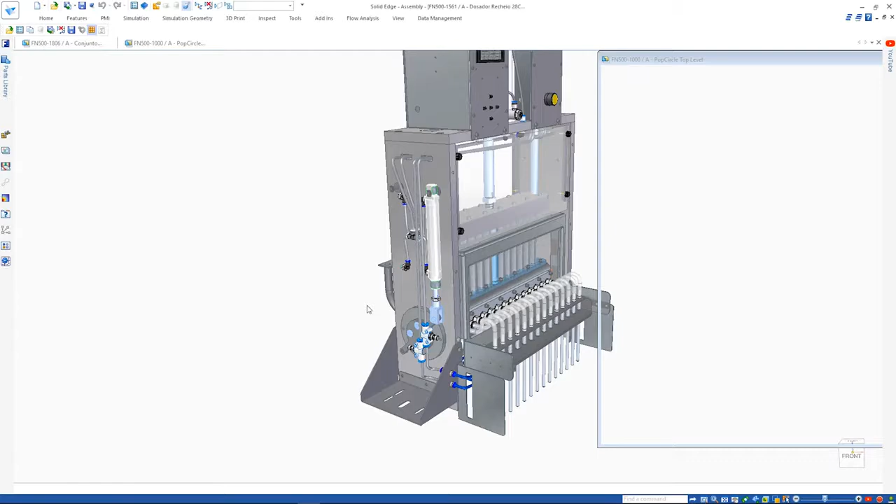It's common practice for suppliers to provide a 3D file of purchased items, such as this piston assembly. Using the new Internal Components option, all separate parts are contained within one single assembly file, with no parts written to disk. This enables faster import times, especially on larger data sets.

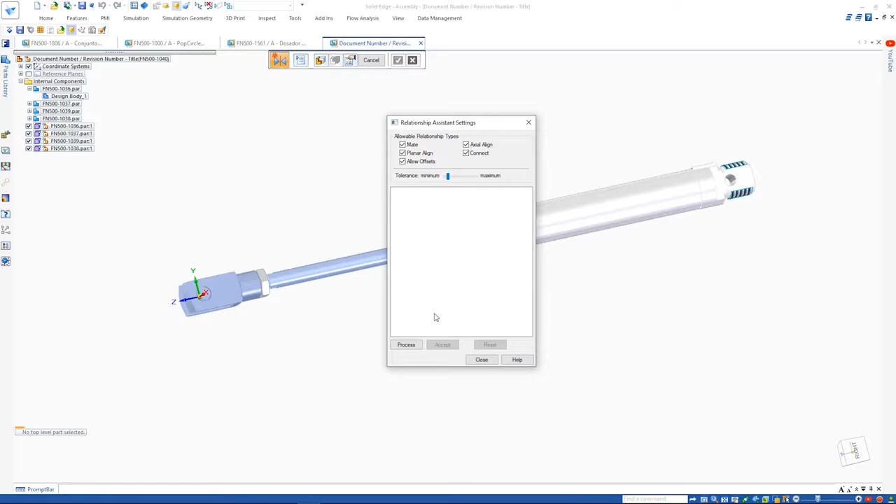Even though these parts are all internal, we can still analyze mechanisms and then assemble the item in a way it would work if it were a regular assembly. Assembly relationship creation and many other operations such as measurement can be performed on inactive parts. This provides increased performance and lower consumption of system memory. Here we see the correct operation of the piston assembly with its internal components.

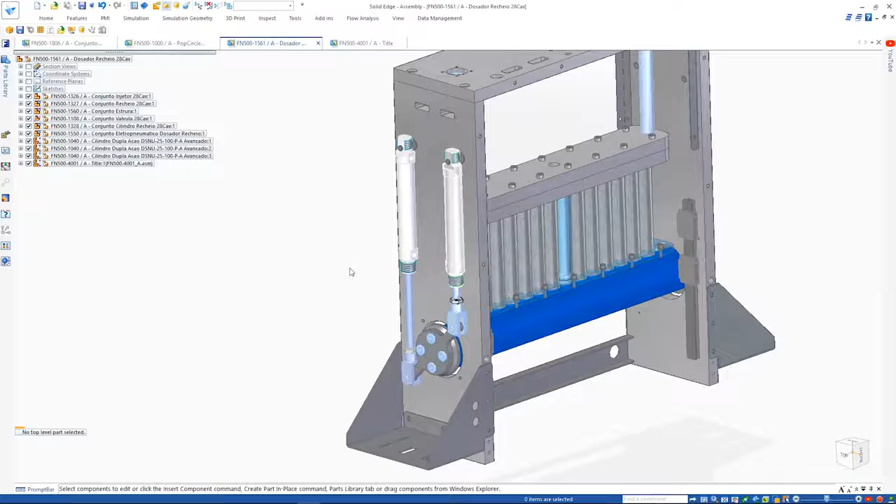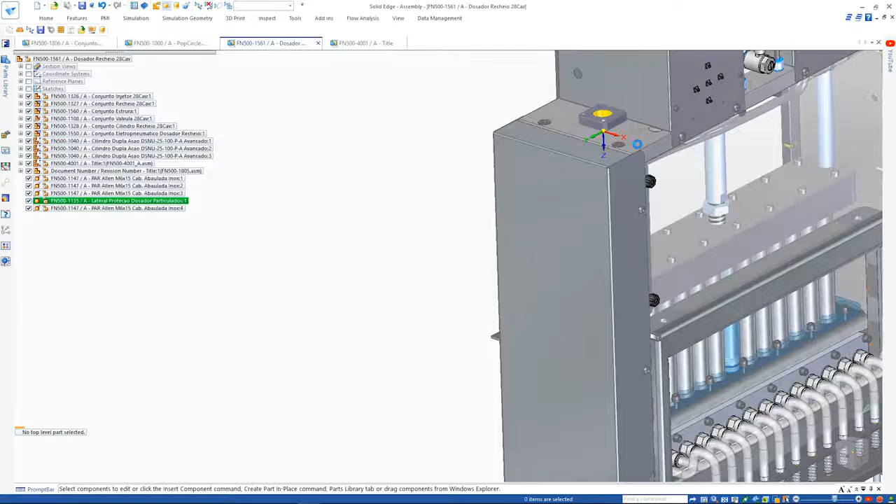Reusing designs is easier too. Now when copying and pasting multiple parts and assemblies between designs, existing assembly relationships are automatically captured and reused in the target assembly. A step-by-step process guides you through the operations to add the external relationships required to fully position the parts. All internal relationships come along for the ride. This significantly reduces the time for these operations.

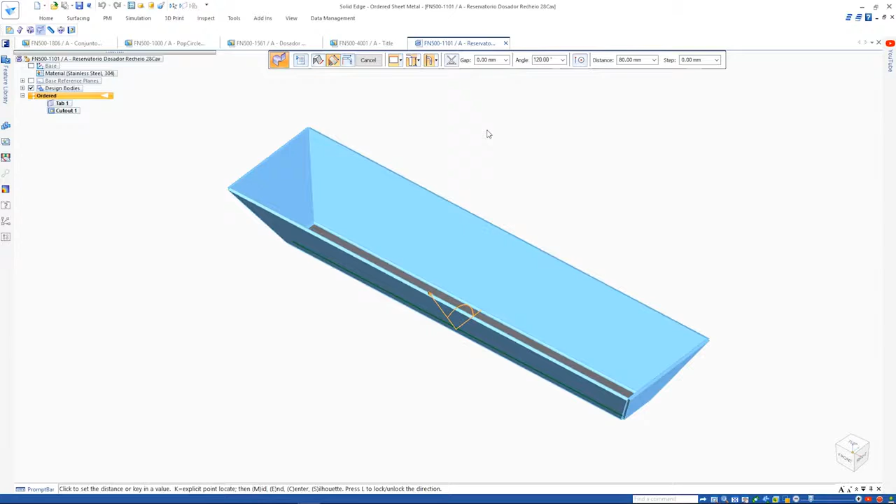A new multi-edge flange command speeds the process for designing sheet metal parts. Multiple edges can be selected at the same time, angles can be defined, and miters automatically added. It's as simple as picking the edges and then pushing or pulling.

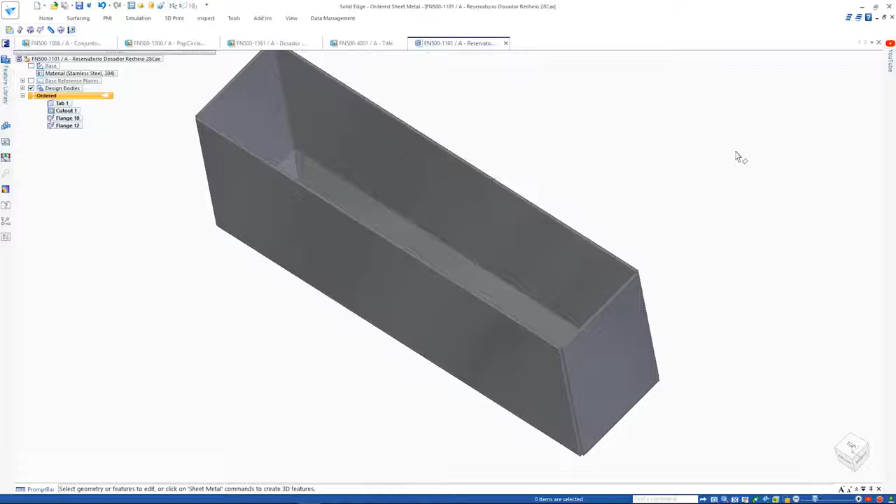In addition, partial or centered flanges can be defined, and trim options make light work of tasks that would normally require multiple operations, even with offset or gap distances if required. These sheet metal enhancements, along with many others, increase productivity and efficiency by being able to design parts faster and easier.

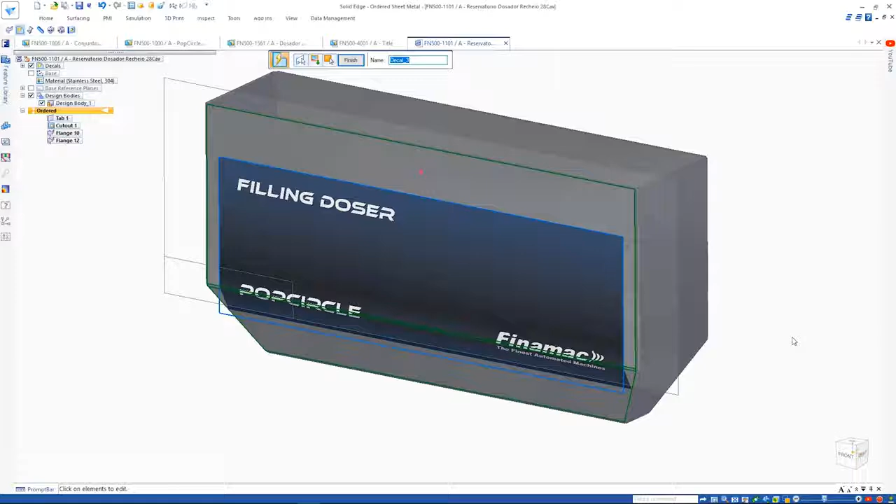A new Decal command makes it quick and easy to add labels and images to parts. Simply select the desired image, define the desired size, and position it accurately using regular sketch relationships and dimensions. The decal can span multiple faces as we see here. However, changing the position of it is as simple as modifying the dimensions or relationships.

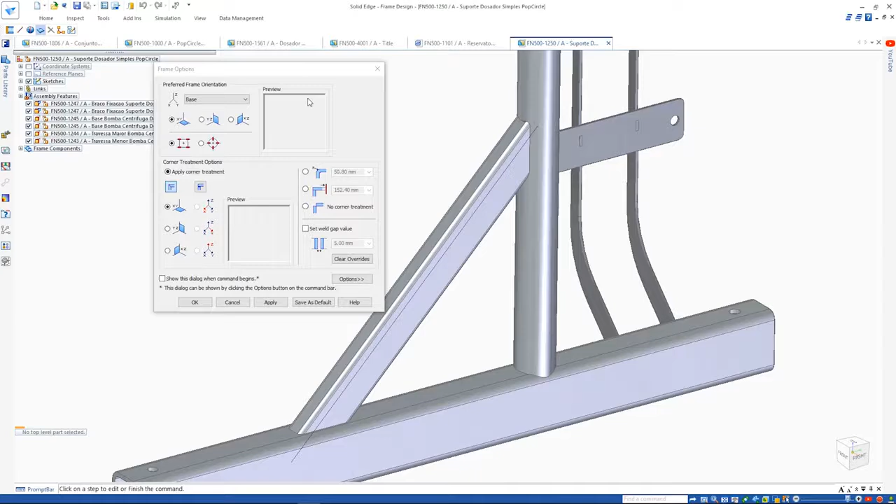Solid Edge 2021 also sees enhancements in frame design. Here we'll place a cross frame which has coping applied so that it matches the circular cross-section of the vertical frame. Now we can specify a weld gap between two frames. This is especially important in generating an accurate cut length of welded frames in our parts lists.

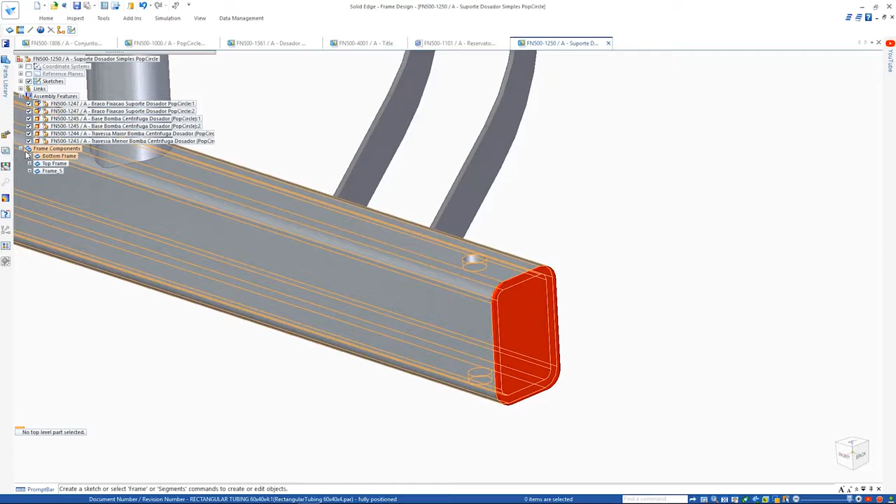The new end caps command allows the quick definition of these types of parts within a frame. This single command provides a wide range of options. Simply select the frame cross-section, choose the material, and specify the type. Choose from different types like inward or outward, and even define offsets or have chamfered corners. The end caps are reflected in the bill of materials, eliminating additional work for the user.

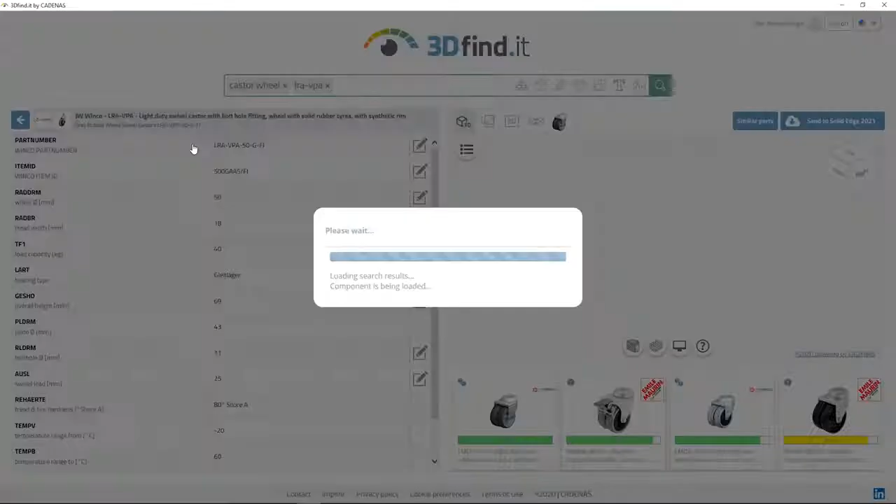A new online parts catalog makes finding and reusing supplier parts a breeze. There are various ways of finding models, even by using shape search if necessary. We can view 3D, 2D, and sectional views, or even compare two models to visualize variations. Once selected, a single click places the part into the assembly.

Solid Edge 2021 continues to employ cutting-edge improvements to help you realize productivity gains in the tools you use most often.